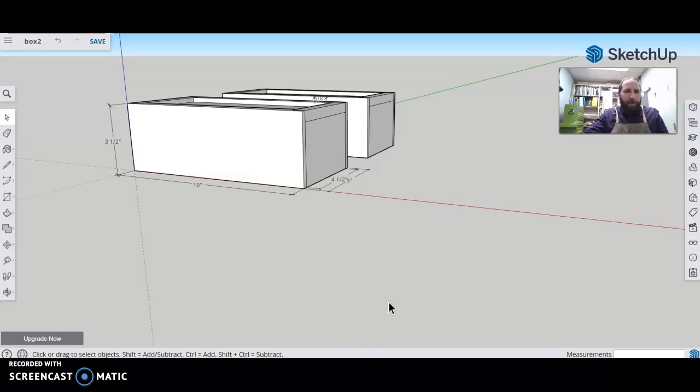All right, welcome to the third SketchUp tutorial. In this one, we're going to be modeling the same box, but complete. By the time we finish this, we'll be able to treat each of the pieces like they will be in real life, like an actual piece of wood.

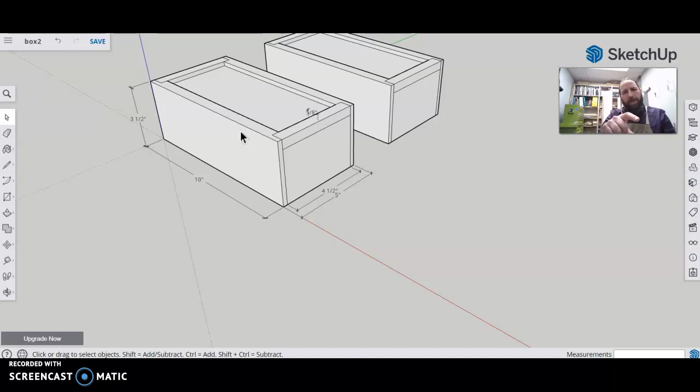Some of the new skills and tools you'll be using today: push-pulling in different directions, push-pulling to make something disappear entirely, rotate and copy, mirror, and modifying components so you can take a component where you have four of them and make two of them different. That's pretty useful. We're going to play around with styles too. Let's see where it goes.

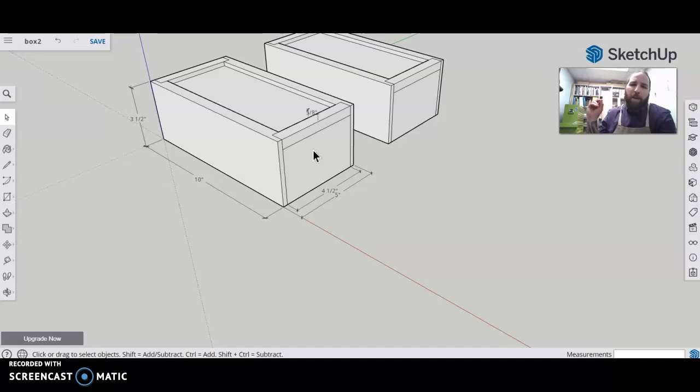I'm going to use the same measurements as last time, keep it simple, and draw my box over here on the right, starting with one of the end pieces. Eventually I'll end up with two sides that have rabbets in them. I'm going to have one solid end, this end of the box, and split another one. I'll basically make a handle on its own, and I'm actually going to create that from one of the other components. It'll be an interesting one.

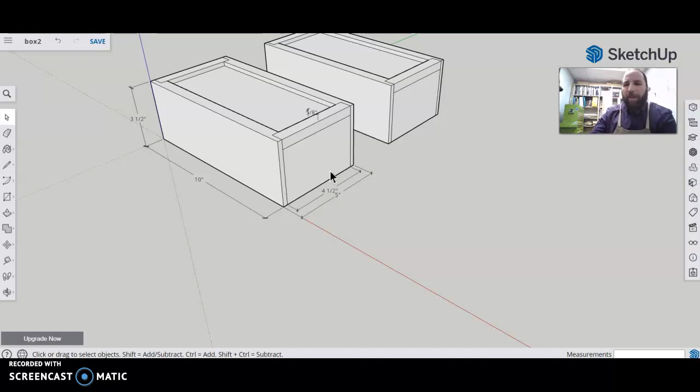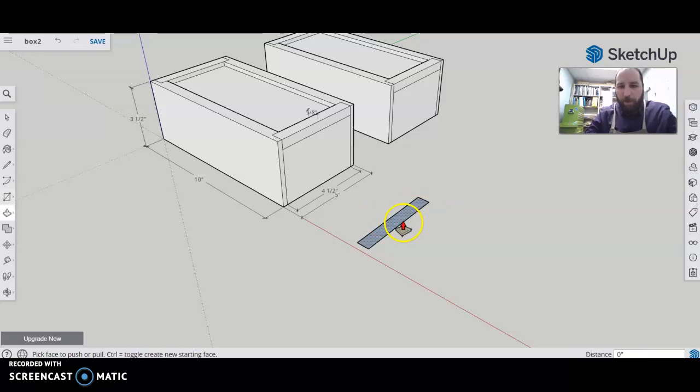You'll learn some things. Starting out with a rectangle, I'm just working on the flat plane that we start with every time, typing in 0.625, that's 5/8, and 4.5, so 0.625 comma 4.5. There's my start. I'm going to push pull that 3.5, enter.

By the way, if I use my mouse from the right, anything that it touches is selected. If I work from the left to the right, I need to fully go around something for it to be selected. So you'll notice up here, it's not selecting that, but if I go right to left, it does.

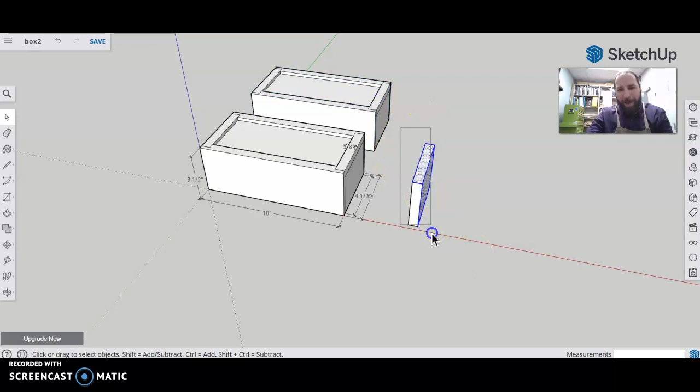Anyways, I am selecting this entire end, right click, make component, and I am naming it end. So anyways, there's an end. I'm going to double click and edit it. And the reason that I created a component first is it keeps things simple.

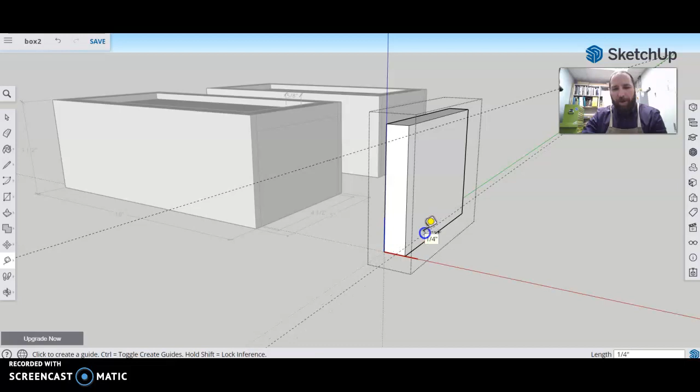So I'm just creating two guidelines here, one at the top, one at the bottom. They're both 1/4 inch up from the top or from the bottom. And I'm going to create these dados. So that's what I'm doing right now, creating a pair of dados, this one at the bottom. I'm making it different from this one on the top, just so you can see.

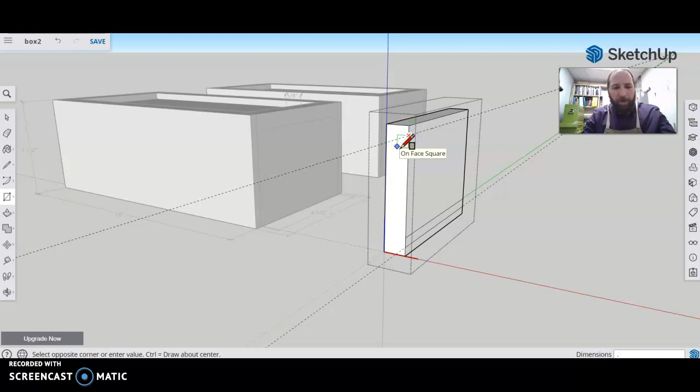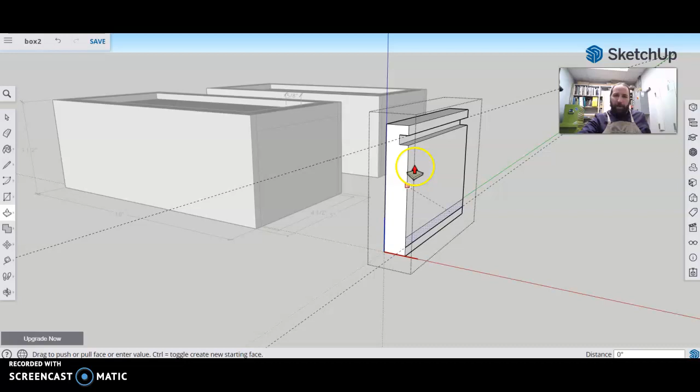So I'm typing in 0.25 comma 0.25, just so you can see that we can make the same thing in different ways. I'm using the push-pull tool for both of these, just clicking and dragging that square along, and you'll notice that it does delete that when it gets to the end. This time, I'm actually inferencing up here at the top, so I'm going in 1/4 inch. It gets you to the same place, two different ways of doing it, totally fine.

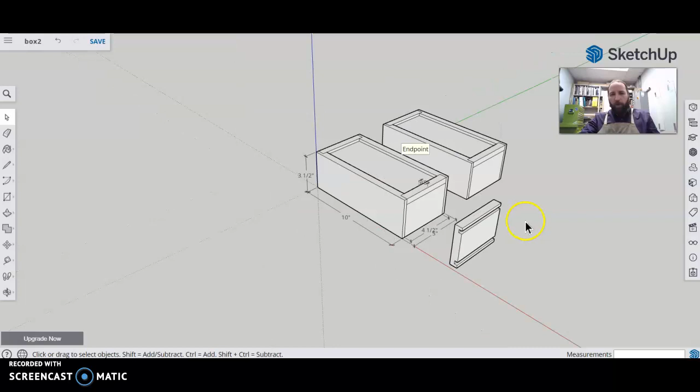So there it is, there's my end. I'm just going to reopen that or edit that and get rid of those two guidelines. I'm going to reselect it and hit Q.

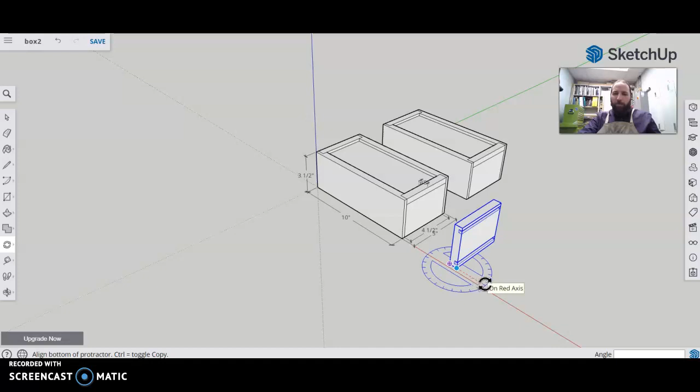Q gives me the rotate tool, so I can rotate this in a bunch of directions. Typically, I want to see that protractor be red, blue, or green. If you see it and it's black, it means it's rotating in a weird compound angle, and it will be difficult to deal with. So what I'm doing here, I want to see it blue. If I hold shift, it should stay blue. And I'm hitting control again, which means I'm making multiples. I'm going to type in 90, enter, and then hit 3x, just like we did the other day.

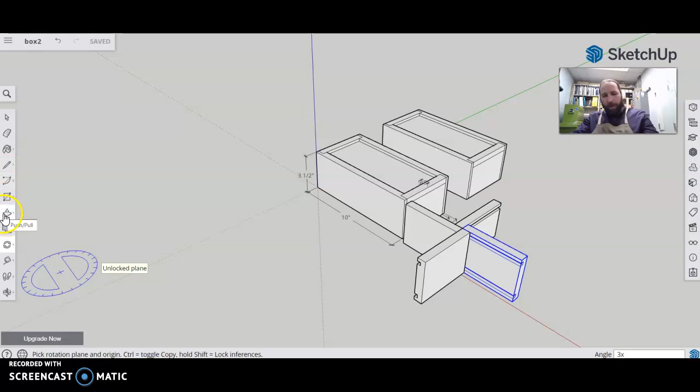So now I've got four end pieces. Now this isn't ideal. They're not lined up exactly where I want them to be, but that's okay. So what I'm going to do now is move these around. And when I move things, I usually try really hard to grab a useful corner.

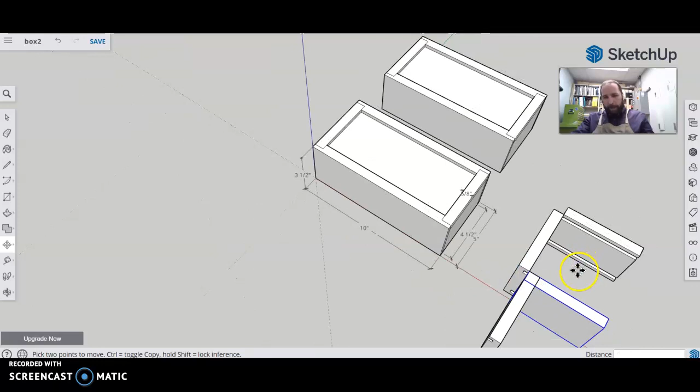At this point, I'm going to move that to there. I'm just hitting the space bar. Oops, I grabbed that. Oh, you know what, that was the right corner. And I hit the space bar. That gives me the select tool.

And then when I'm moving these, I want to grab a nice point. Now, there's a box. It's not right. I don't have rabbets on the sides. The dimensions aren't correct. So I'm actually going to use my tape measure tool, 8 3/4. That's a measurement that I want to know. I could go 10 inches. So I'm going to just...

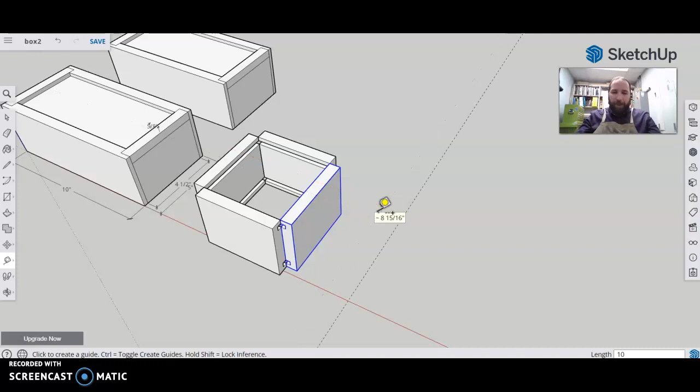Use that as a guideline to move this. So I'm going to hold shift to make sure that I'm on the red axis. And I'm going to bring that over and grab on, use that guideline so that I know that it's 10 inches from the outside of this to the outside of that.

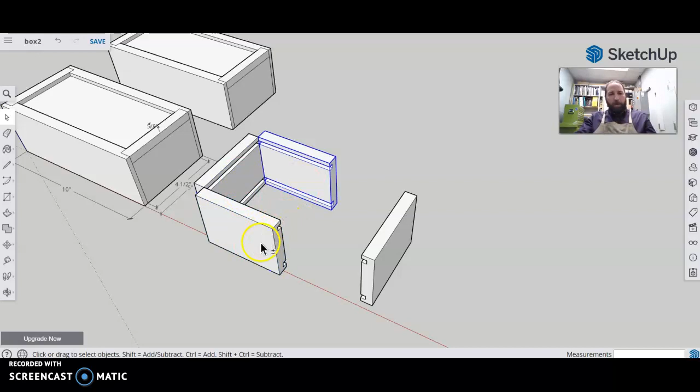So at the moment, I've got 4 of these. These are all the same thing. What I want to do is make the sides different. So I'm going to right click, make unique. What that does is it means that if I edit this, I'm only going to be editing these 2 components.

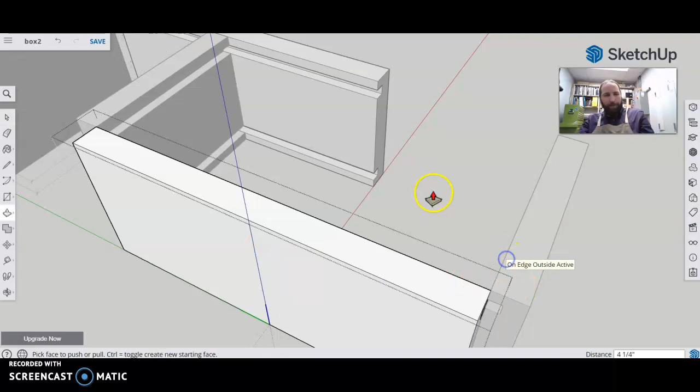So I'm just going to push pull that, and I'm taking it to this edge. You'll notice it's done something weird. It's run that in the other direction. That's okay. To finish this off, I need to make my rabbets.

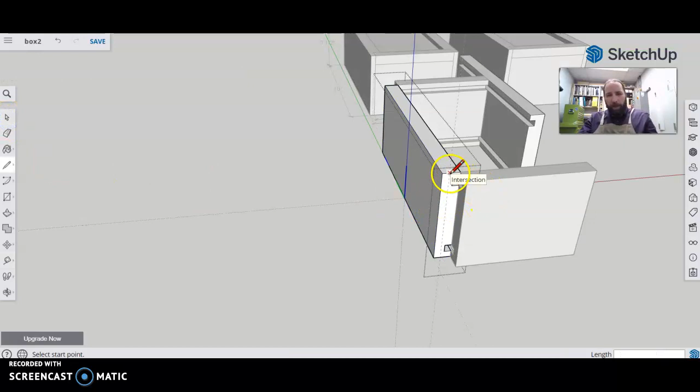So I'm going to do a guideline there. And I'm just going to draw a line from the top to the bottom. And I'm just going to push pull that one little section, and I'm going to inference on this. That gives me a piece that I'd like right there.

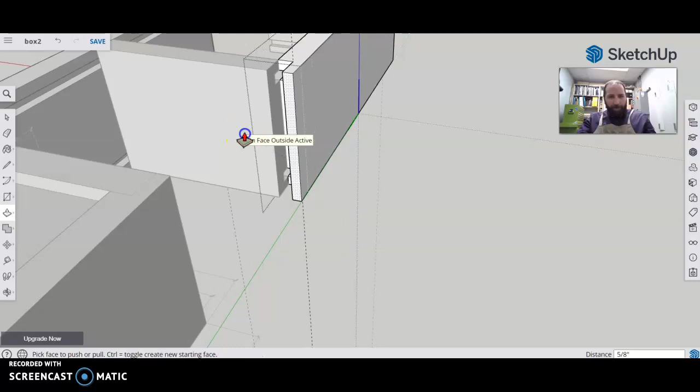Okay, I need to do the same thing at the other end. So I'll spin around, use my tape measure tool, 1/4 of an inch in, a line from that intersection to the bottom, push pull, and I'm inferencing over to that other edge. That's given me...

Sides. I'm now going to move this one so that it fits where it should. So you'll notice I grabbed the corner of the rabbet because it's a useful thing. I could also grab that back corner, line it up. So now I have...

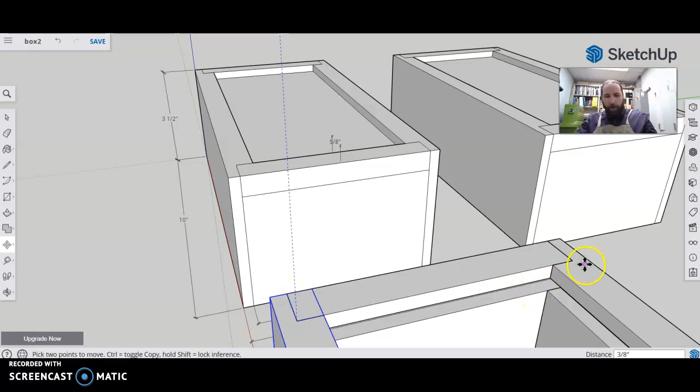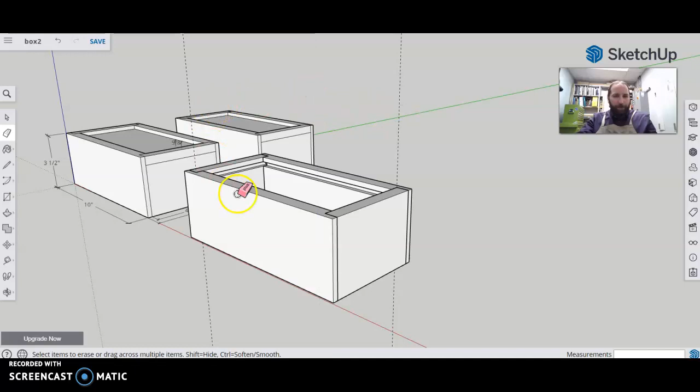A better box. Now I have a box that has details. I can kind of explode that. Come on, click. There we are. There's the pan. I do want to get rid of those guidelines. I can get rid of one. I'll have to edit this to get rid of the other one, but that's a little less confusing.

I'm actually going to move this end out because I want to turn that into a handle. So oddly enough, I'm going to work outside of this component, and I'm inferencing. You'll notice I came over to this corner first, and I'm basically just drawing all the way around, and you see that it's changed color.

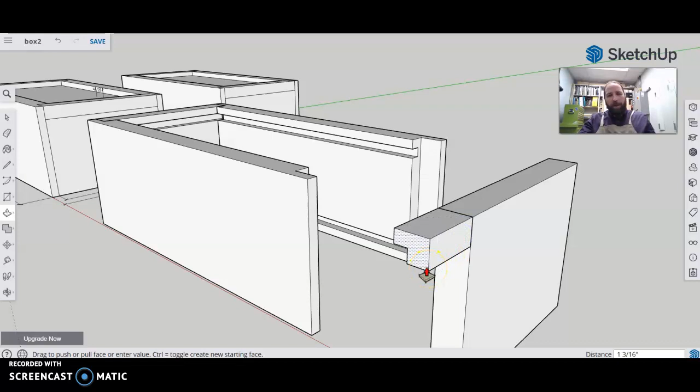So at this point, I'm going to push pull, and I am still working outside of that component. If I triple click, hit G for make a component or group, I'm going to call it the handle.

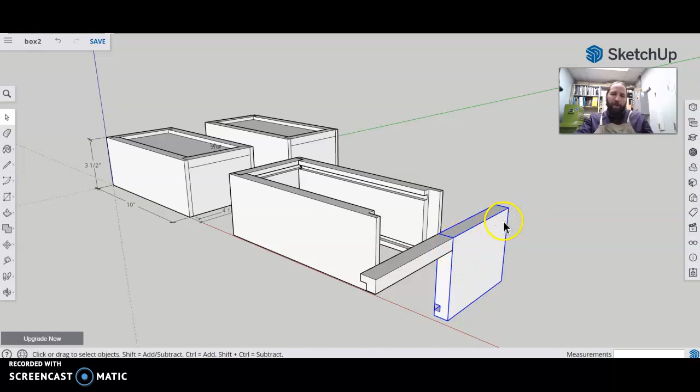So there it is. Now to make space for that handle, I need to push pull that top section away. I'm going to make this unique because I don't want to have an open end at the other end of the box.

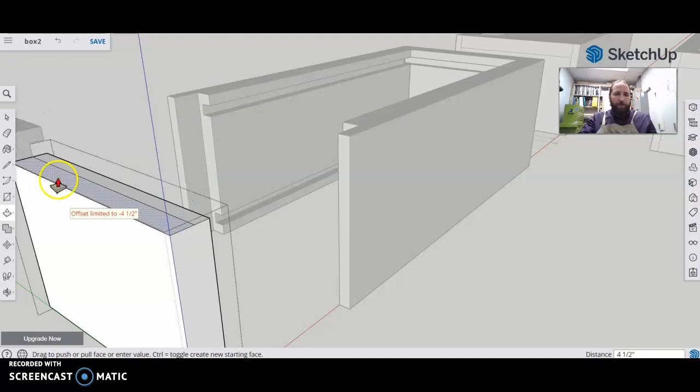So I right click, make unique, double click, I'm editing that. I'm just drawing a line. Let's zoom in on this. I'm drawing a line across, push pull 4.5, or I just drag it down to the end. I'm going to erase that line to clean it up. And there we are.

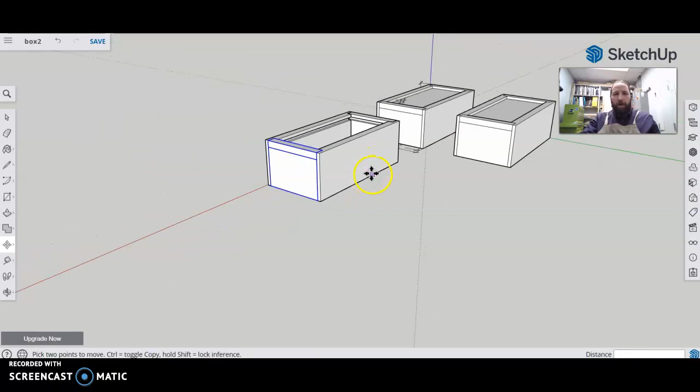So I'm going to move this one back into place, and I'm going to select these two things. I've selected both of those by using the Shift key. I'm just going to drop this back in place. So there we are. That's given us the basics to the box.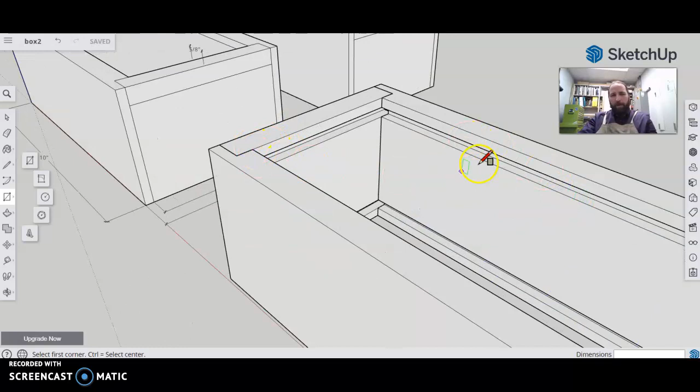To finish this off, I need to create the top and the bottom. So I'm grabbing the rectangle tool again, and I need it to be bigger than this inside space. I need it to be the size of this inside rectangle plus a quarter of an inch in. So for that, I'm going to use the offset tool again.

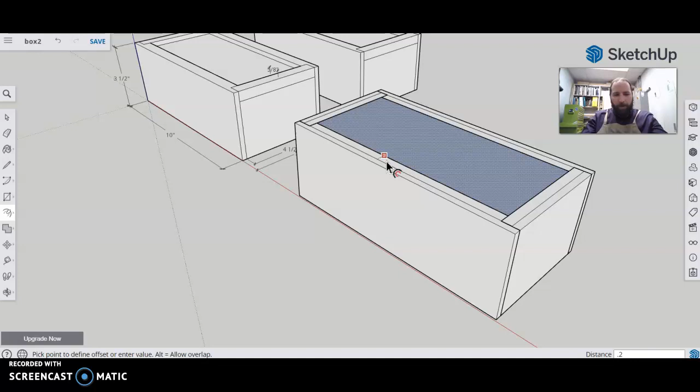One thing to be aware of: if you draw a rectangle like that up against other items that aren't components, it's going to cause you headaches. This is one of the reasons I always use components. So I'm selecting that surface, typing in 0.25, and that has given me a wider edge.

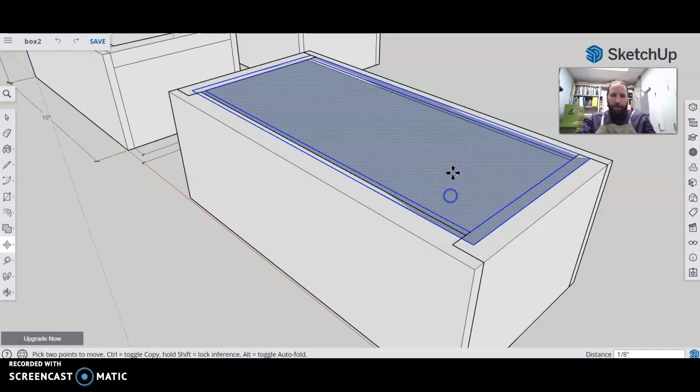If I grab the erase tool, I don't want to delete that. What am I doing here? So single click, double click, triple click. I'm just going to move this straight up away from the box a little bit so that I can erase that inside rectangle.

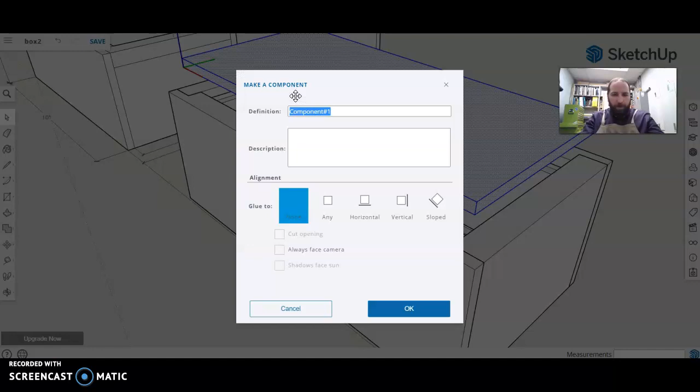Push pull, 0.25 of an inch. Triple click, group, top. You could call it top and bottom, whatever you want.

And what I'm doing here is I'm going to move it so that it's on that face. The reason I'm doing that is I want to then be able to move it down a quarter of an inch, and it should be in its right place.

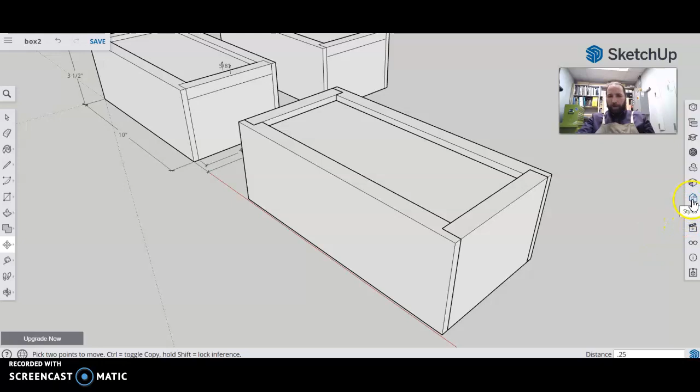Something we're going to do here is play around with styles. There's a bunch of styles that come up. I'm going to go with default styles, and this one is useful. So if I click on X-ray, double click, there it is.

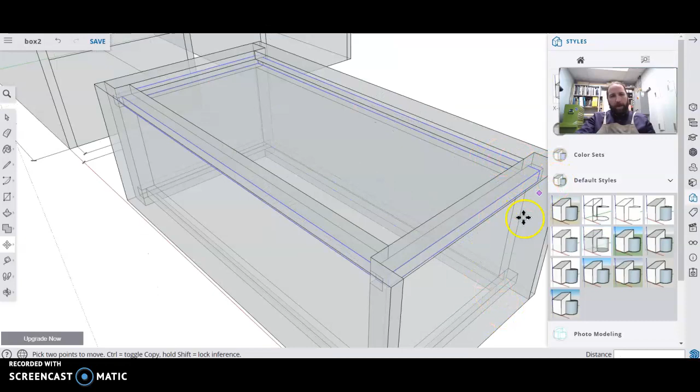I should then be able to see if my top and bottom are in the correct locations. So when I orbit around, you'll notice that the height of that top is in the right location, and you'll notice that it is selected at the moment.

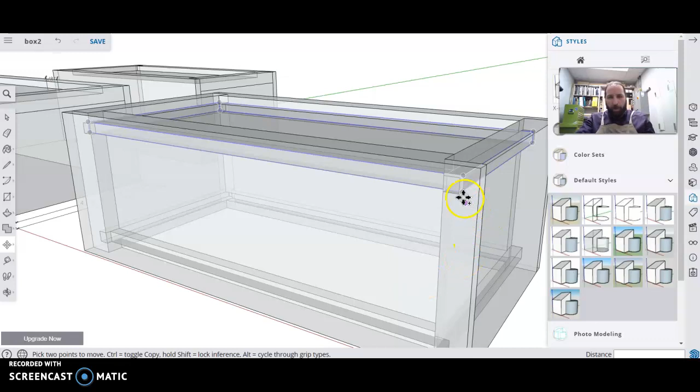So if I hit M, Control, I'm actually going to go from that center point straight down and hopefully get it to land where I want it to go. So there it is, I've now got a top and bottom. I'm going to go back to a normal modeling view.

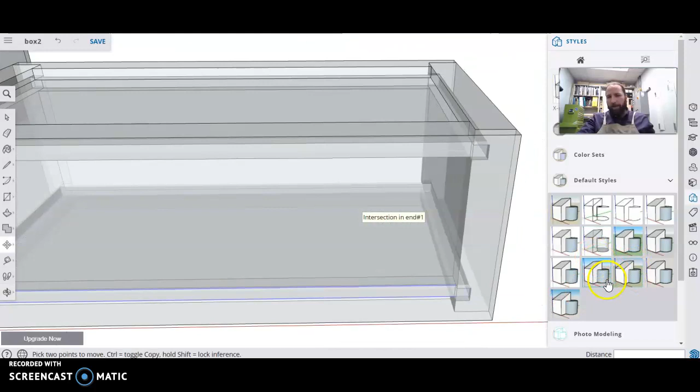They're all slightly different, but they all work basically the same. So that gives me kind of... where did my handle disappear? What happened to my handle? We'll have to figure that out.

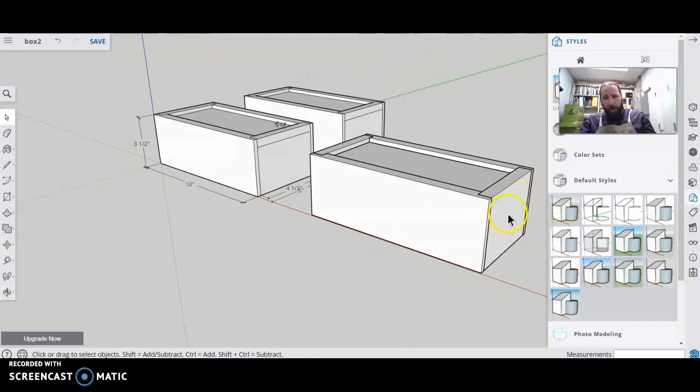Anyways, I should be able to select independent objects and move them around. You can do an exploded view of something in this way. I would recommend that you move them all equally, keeping that movement on the green or the red axis.

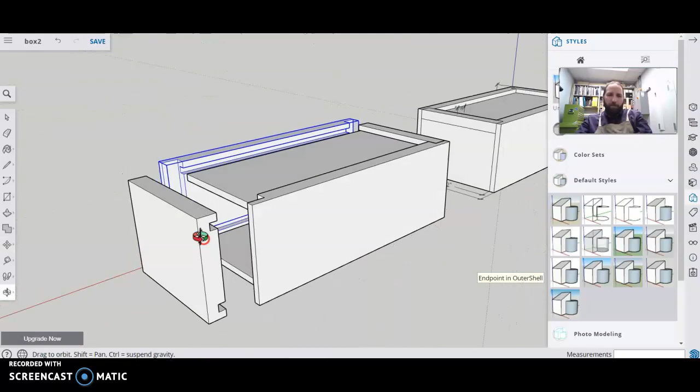I really do wonder what happened to my handle. That is so weird. Anyways, there's the basics. I've lost my handle, it's okay, I can make a new one again.

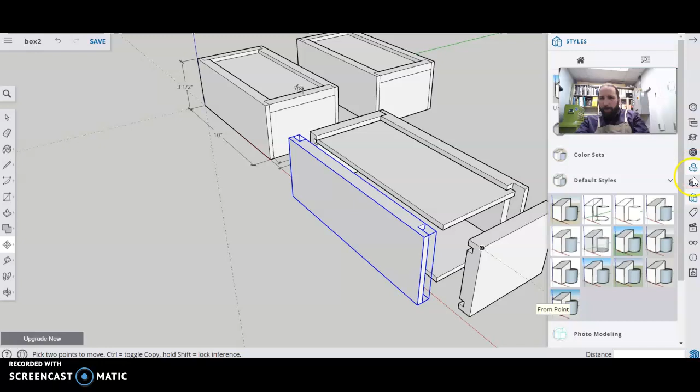By the way, if I come up here on the right - oh no, that's the Instructor - I want the components, not materials, components. There it is. If I click on that, I should be able to find the handle. And here it is, there's my handle.

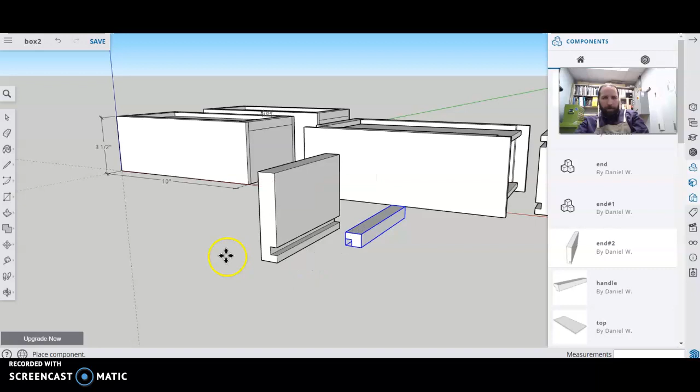So I've got the handle back. I don't know, oh there's the end. Weird. So anyways, there's the basics.

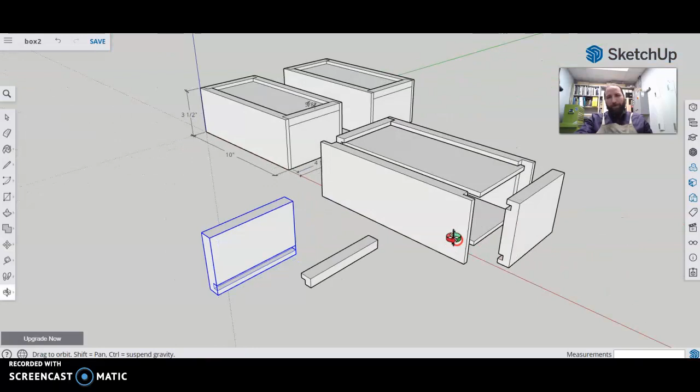I've got 15 seconds to wrap this up. I would clean that up, play around with these toolbars so that you see what's happening. I hope your handle doesn't disappear on you. Keep your useful items as components. That's it, I'm done.